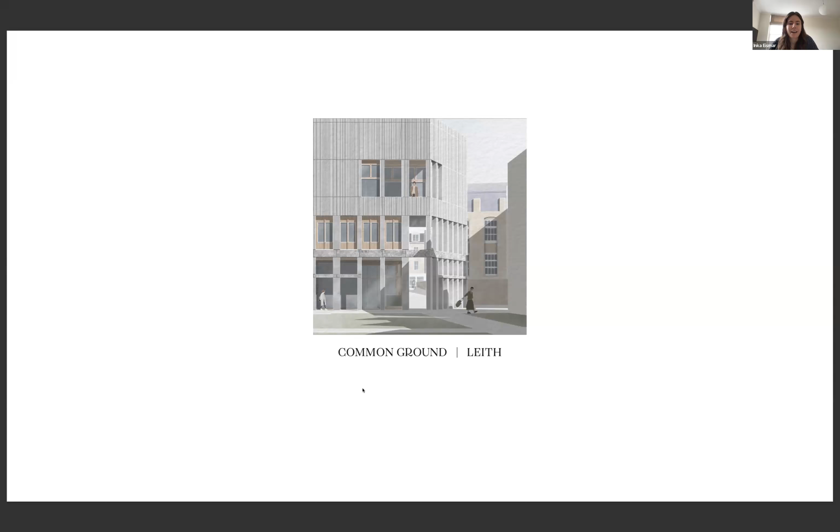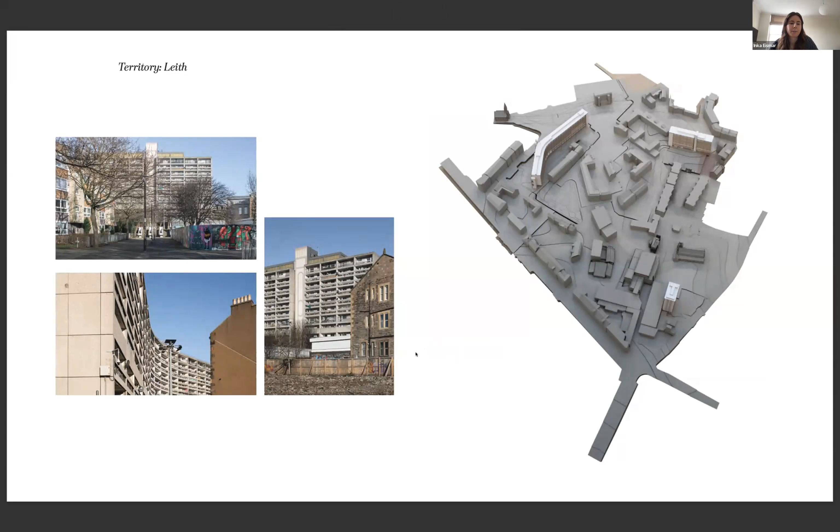The project sits in a particular area of Leith, bound by several tower blocks, part of a modernist redevelopment of the area, which define the character of this part of Leith and this neighborhood. The neighborhood faces challenges common among public housing estates, such as unwelcoming landscaping and a lack of shared amenities, and a general lack of public space that brings people together, with more of an unwelcoming and fenced-off character rather than something that joins a community together.

The proposal addresses the New Kirkgate development in Leith, a site dominated by one of those large tower blocks and a platform sitting in front of it. Historically, Kirkgate used to be a trade route connecting Leith Walk, which connected back to the city of Edinburgh with the harbour. There were multiple public institutions, from when Leith was a city in its own right, sitting along this connection to the harbour and along this trade route with loads of shops and public institutions. The old town hall of Leith also used to sit in this neighbourhood.

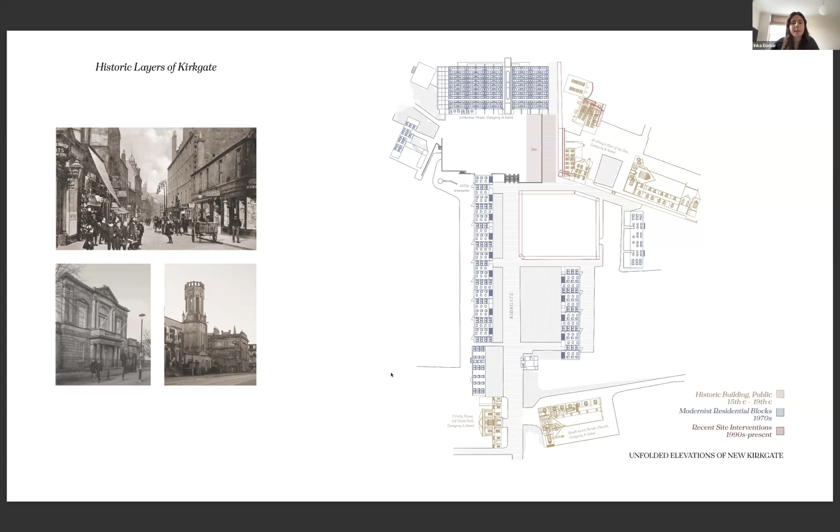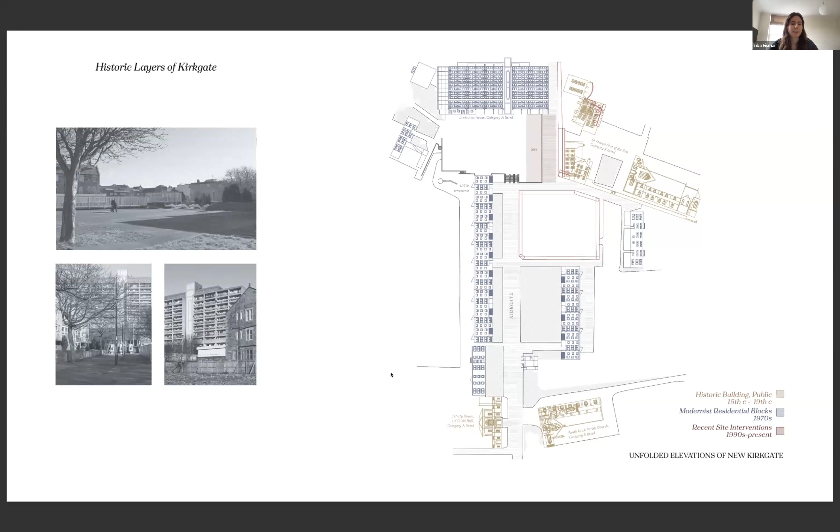Superimposed on this was a modernist master plan, highlighted here in blue, which created a lot of free public space and got rid of much of the historic street pattern. But it then created open space that was more fenced off and inaccessible to the public, resulting in a lot of public space that is currently unused and not really enjoyed by residents.

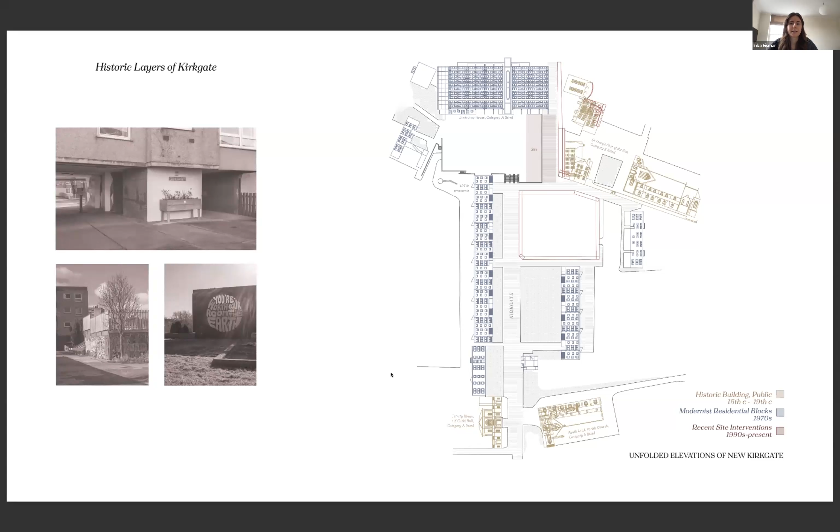At the same time, there have been more recent demolitions and also community additions. Over the last years, there have been more community interventions that have grown organically, with communities meeting in makeshift places in an effort to make the area more livable and bring residents together. This is what the proposal of the town hall builds on.

So with this context in mind, the proposal deals with two main questions: first, civic space as something integral to functioning cities, and second, the current question of what to do with housing developments that have been neglected over the years, and how to transform them so residents can enjoy them again without just demolishing everything and starting over, which I perceived as not very productive.

In the same vein, I dealt with the question of longevity and not starting from a blank slate, designing a structure that is future-proofed and can be reconfigured. So the conceptual approach was to design a building in layers from the outset, as something that will evolve over time rather than presenting one final output.

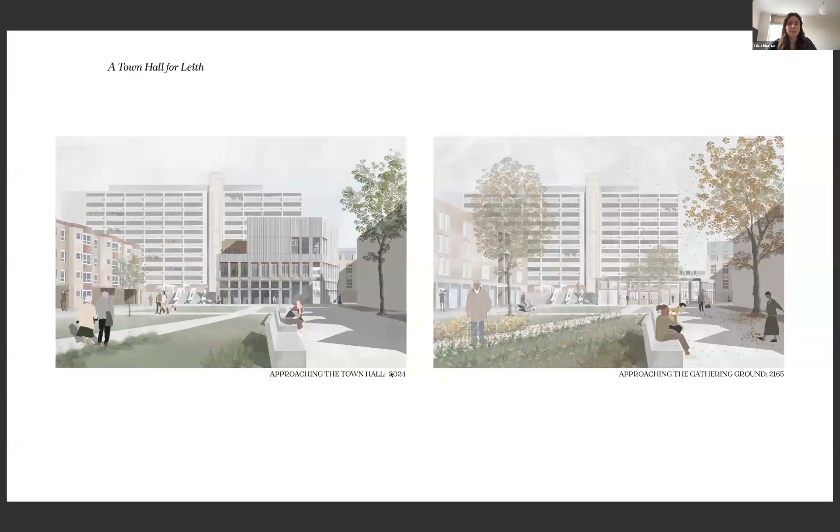As mentioned before, the proposal introduces a town hall to this fragmented site with a program intersecting local government and community groups already present in the area. The proposal suggests both reinstating the physical fabric of Kirkgate as a dense urban fabric, and restoring its social function as a site of civic institutions.

Placing a town hall in this area becomes more of a symbolic move that gives back agency to a territory that has been largely overlooked following the discourse around public housing estates and perceived political failure, and how these estates have been discussed in the media.

So the goal is to transform the territory around Linksview House back into a thriving civic space that actually brings the community together.

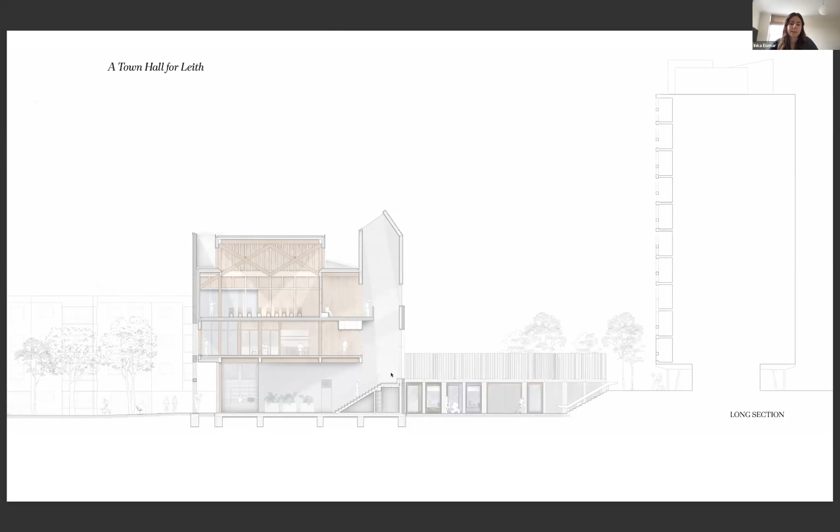From an architectural side, I looked at the open public space and took inspiration from the smaller spaces created within these modernist housing blocks, finding their interesting and quite beautiful nooks and niches, which seemed more appropriate to human scale rather than those large unused platforms and streets.

From a site perspective, the town hall divides this open space into smaller squares more appropriate to community uses, and acts as a hinge point between those squares and the routes, tying the town hall back into the wider city.

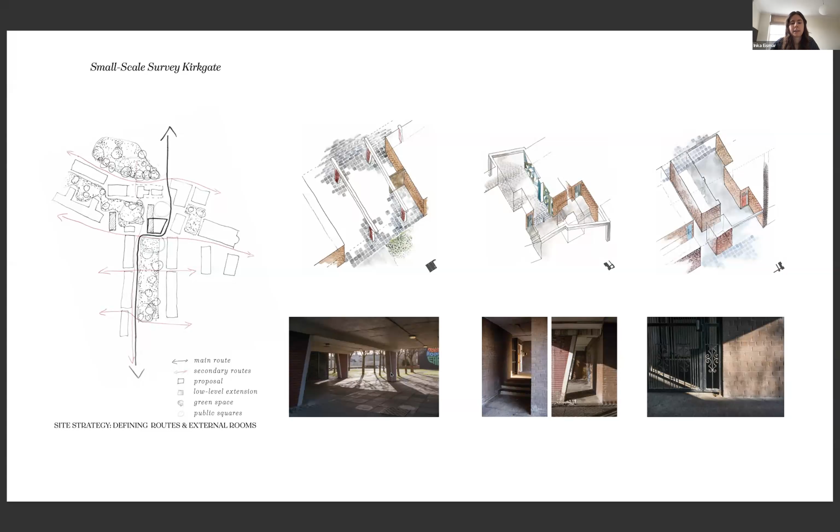The program combines traditional functions of a town hall, like the debating chamber and administrative section, with spaces for community groups, giving those groups that already exist in the area, and potential new ones, a platform of advocacy and interaction with local government to increase the reach of their voices.

The building is structured according to a simple hierarchy, where community groups and commercial and public facilities are placed on the ground floor, with administration on top, and a debating chamber sitting at the very top in a double height space.

There's a possibility that the administrative parts, like offices and meeting rooms, can also be taken over by community groups—so not drawing rigid boundaries, but creating multifunctional spaces for different groups.

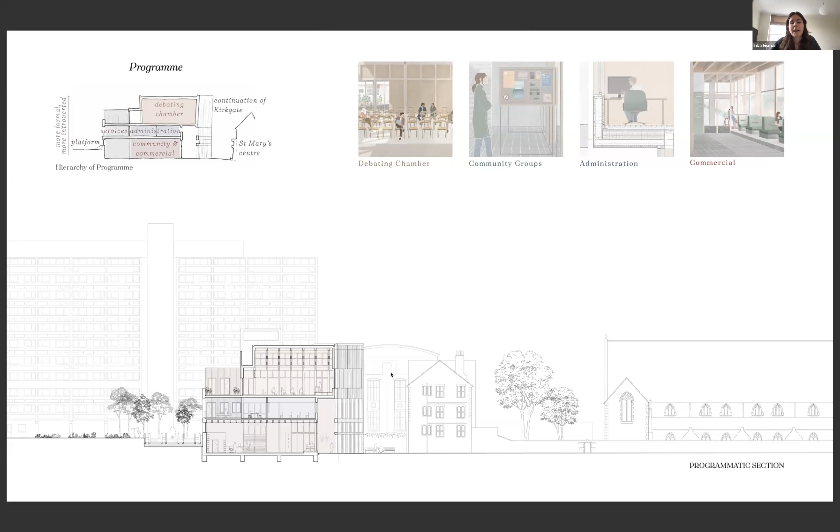As mentioned, the most essential part of this design intervention was the transformation of this little-used public space around Kirkgate into a vibrant public space. The proposal seeks to safeguard the newly created public space beyond the lifespan of the town hall itself, which I envisioned by designing the building as a system of structural layers, each with its own rate of change, allowing consideration of adaptive reuse and embodied carbon of the material layers from the outset.

The main layers of the building are shown in the exploded axonometric on the right, with the most permanent layer being the stone envelope at the bottom, which generates an external presence for the building and forms part of the main external load-bearing structure. This is designed to outlive the building itself, with the possibility that it might frame an external square even after the town hall itself is dismantled.

This was inspired by the ruins of public institutions found all along Kirkgate, which form intriguing open rooms that I aim to emulate with the design itself.

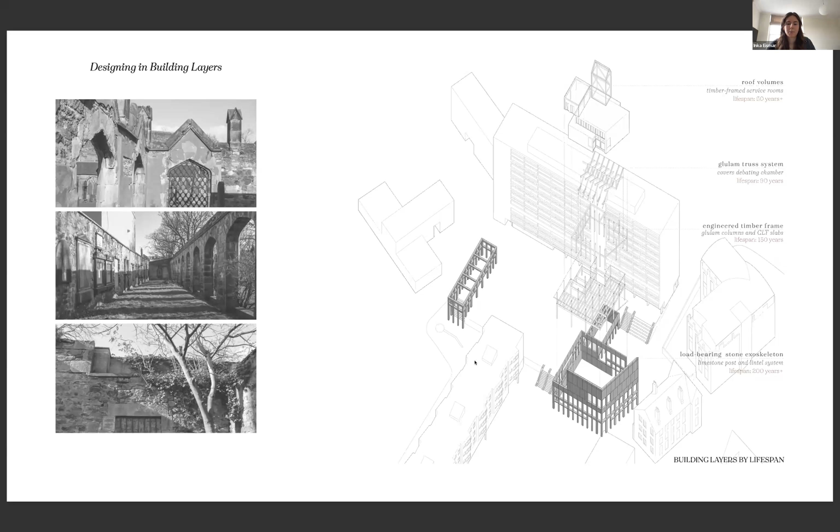Besides stone, the second load-bearing material used in the building is timber. While the stone is used to frame more external permanent spaces and generate a civic presence, the internal timber frame is used to enclose the internal gathering spaces, divide up rooms, and form the internal character of the building.

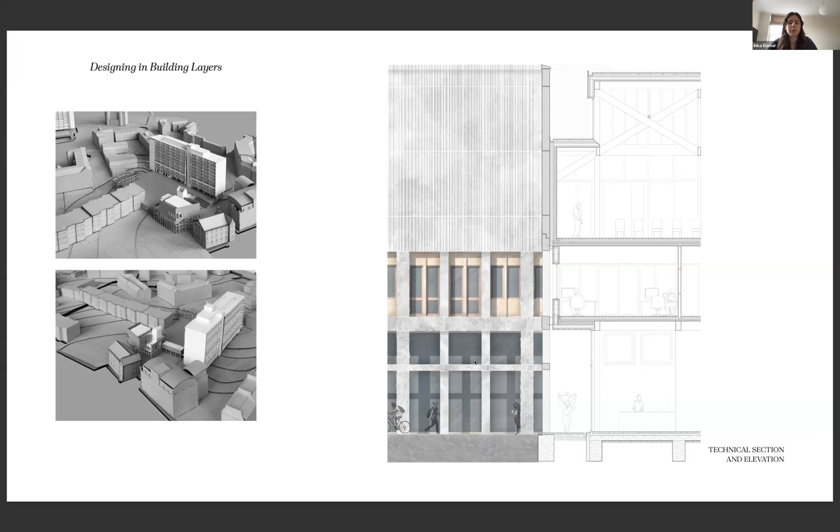I chose a low process approach for the stone, meaning natural extraction marks from the stone are used to express the order of the facade, which reduces the carbon used to finish the stone itself, so it's mostly just the extraction process and transport which result in the carbon footprint. There's potential to offset parts or all of the stone's embodied carbon by the carbon sequestered in the engineered timber frame.

The concept of reconfigurable building layers allows for the consideration of all stages of construction, from construction, use, disassembly, adaptation, to ruin at the end.

By looking at designing for disassembly, I looked at designing mechanical connections so that the building could be taken apart again into its individual components at the end.

It also allowed me to consider options for adaptive reuse, which would, for example, in this timeline be to take apart the debating chamber, which is double height, and transform it into two separate floors, enabling the creation of a mixed-use office or housing block.

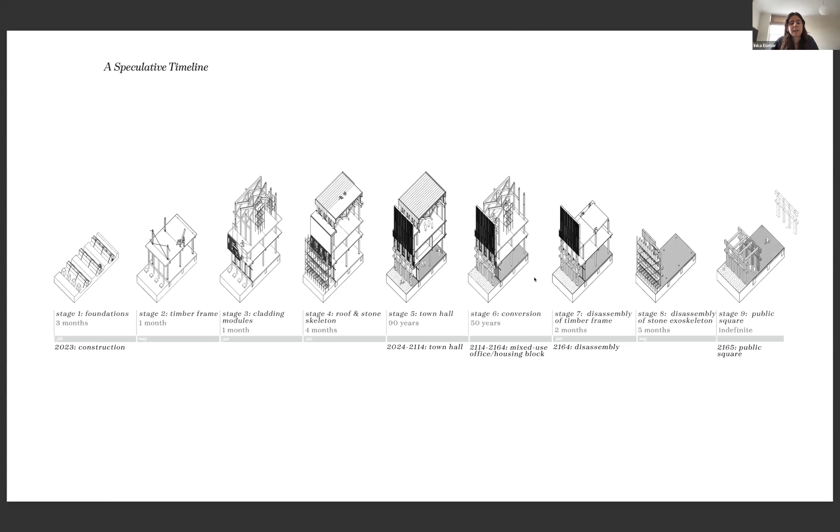In any case, the final stage of the timeline would be the public square, which was central to the design of the building—the idea that even after the town hall itself is gone, there will still be a communal gathering ground, enclosed or semi-enclosed by the stone colonnade, with parts of the facade remaining in place and other parts relocated to form a sort of double colonnade around this little square.

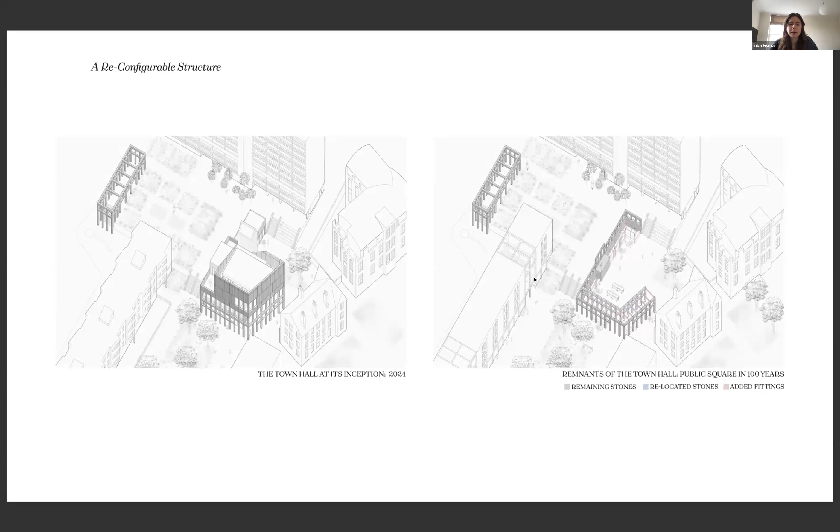Circling back to the town hall itself, the concept of the two material layers—the external stone envelope and the internal timber frame—influenced a lot of how I envisioned the building, with separate layers through which users would move, and the idea of this inhabited facade engaging with ideas of openness and transparency in a public building without being too literal about glass being used and just being a very literal, transparent building.

This tectonic separation of the thermal envelope around the timber structure from the stone structure also created offsets in which external spaces can be accommodated within the buildings, for example colonnades and balconies, which engage with this idea of outside, linking back to the survey I conducted initially of those passageways that run under the modernist housing blocks in the area.

While this site strategy reinstates the historic route through Kirkgate, which was lost in the 1960s master plan, this notion of street is also considered at the building scale, with urban typologies like the street and the square used throughout the building in a route that leads up to the debating chamber at the top.

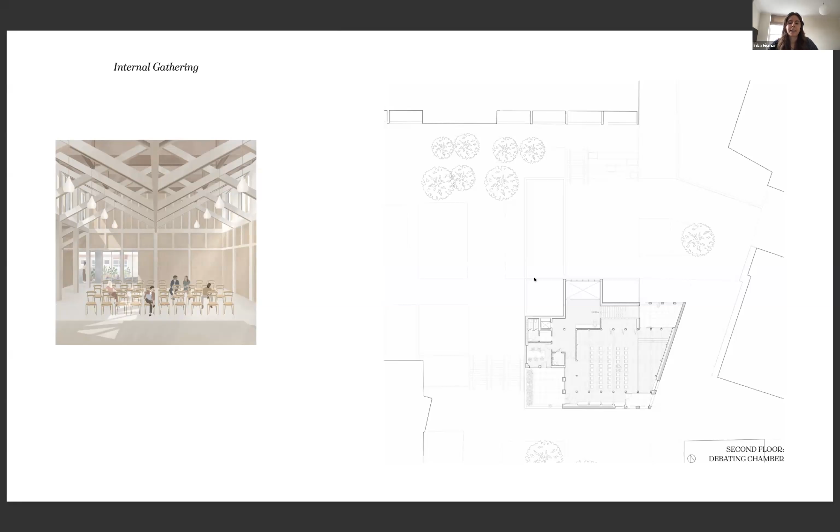This played with the idea of extending the public realm into the building itself through this route, which then ends and culminates in the debating chamber.

Leaving you on this little model image that I spent way too much time on during the semester.

So just to reflect on what I've been up to since last year, because it's been a year since the award ceremony—I was in my undergrad when I did this project, and what I've been doing in the meantime is taking a year out to work.

I've been working at Groves Rains and Leaf, or GRAS as it's now called, which is actually very close to the building site, so I've been driving past it pretty much every morning. I've worked on some conservation projects in the north of Scotland, which was very interesting because I learned a lot about traditional stone structures as opposed to the more modern Amin Taha inspired approach I took in my own project—very insightful, and I learned a lot throughout the year.

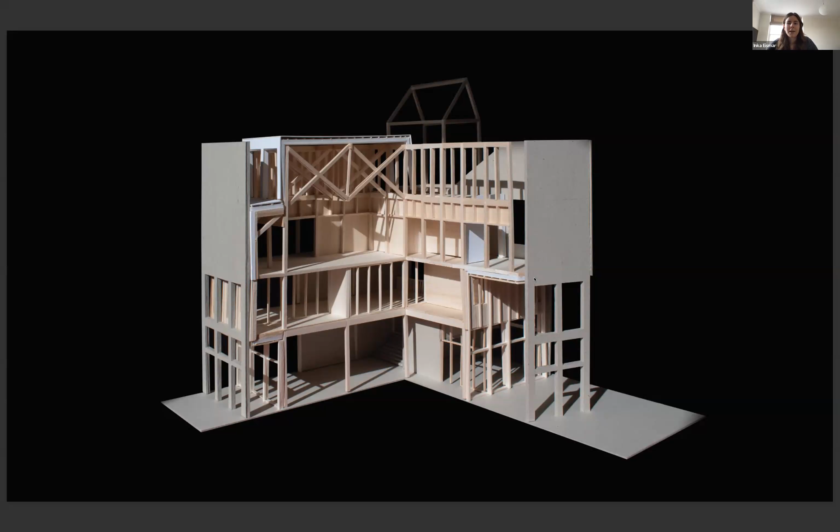The project did pretty well, and this has opened up some opportunities in terms of being invited to talks like this to present the project. I've also been invited back to ESALA, where I initially did this project, to present it and give a lecture on it to fourth-year students who were finishing up their undergrad year.

If anything, this experience has really challenged me to improve my public speaking, which is still a work in progress, but hopefully I'm getting there. Now I am going back to uni to pursue my master's, so hopefully that'll all go well. But that's it for me in terms of my project and my experience since completing it.

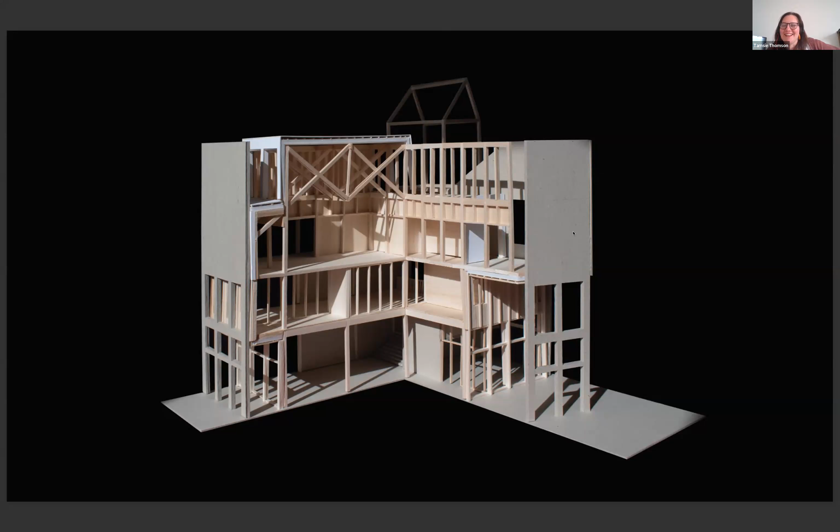Thank you ever so much, Inka. I think we can all agree, I don't know what your public speaking was like before, but it's certainly very good now. So thank you for sharing that with us. A very, very beautiful project.

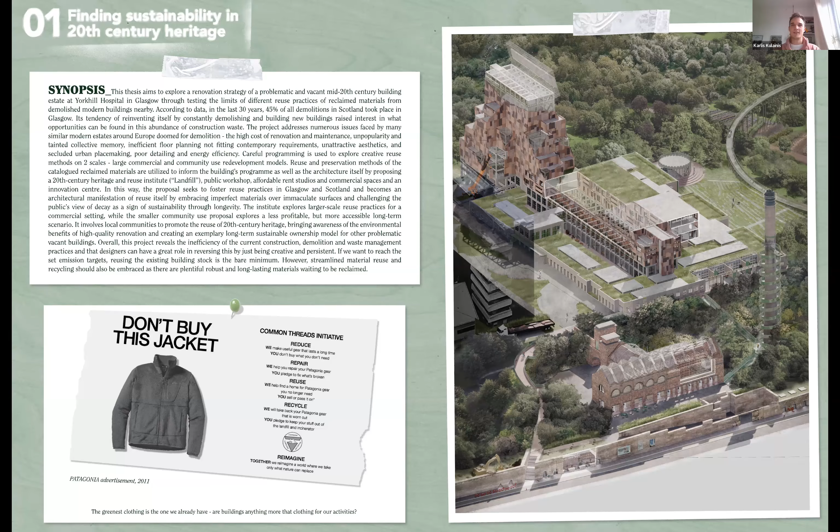And there you can see that's the final proposal already finished. But it was quite a long step, quite a long way to get there. So you can see how that happened.

Our site was in Glasgow. Normally in GSA, where I was studying, you get to do projects in a lot of other cities around Europe, but at the time, due to COVID, we were still based in Glasgow. I'm originally from Latvia, but having lived here for 5 years, I got to know the city quite well.

I was always interested in this context where there's a lot of demolition happening in Glasgow. Statistically, in the last pretty much 30 years, half of the official demolitions in Scotland happen in Glasgow - that doesn't count unofficial demolitions. That showed me there's a lot of materials being moved around, maybe wasted a bit more, and I wondered if I could look into that.

There's also this interesting historic narrative where you can see from medieval Glasgow, there's not really that much left. I'm from Riga, Latvia, where we have our medieval old town center, with lots to see and protect, but there's not that much in Glasgow, because already back in the Victorian age, buildings were demolished due to the filth of the city at the height of the empire - they didn't want that, so they demolished it and kept moving west.

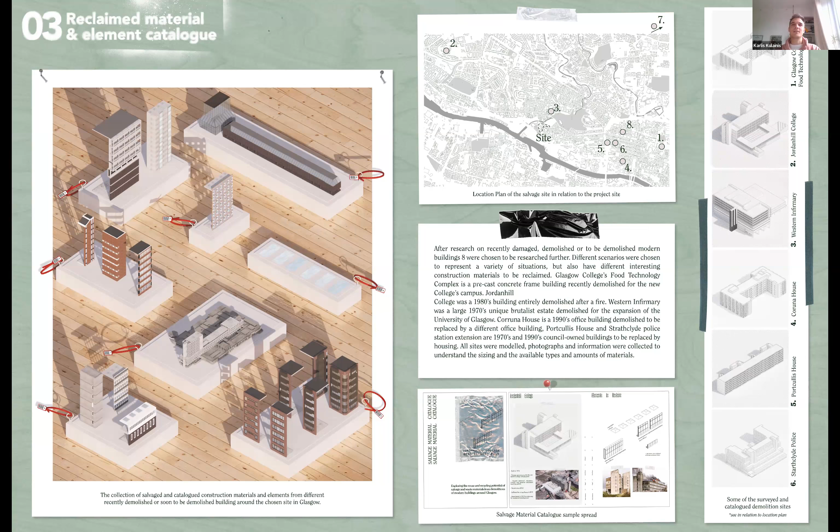But obviously I would need a site as well to test this. So I set out these criteria, wanting a quite problematic site. I set out 6 criteria.

It has to have poor detailing and poor efficiency, quite specific floor planning, so the building is built for just one use, and it's generally quite unpopular. Maybe even has tainted collective memories when the function of the building was something else that has a memory to it.

So if the aesthetics are not that attractive, it's quite costly to renovate, and often with these modern buildings that tend to have very secluded urban placemaking, or they're plonked on a big field.

So I looked at all kinds of sites from Glasgow, and I landed on the Queen Mother's Hospital building in Yorkhill, this ginormous building that used to be, in the 60s, Europe's most modern maternity hospital. Probably at its height it was a very regarded building, but by now it's completely vacant, has been for many years.

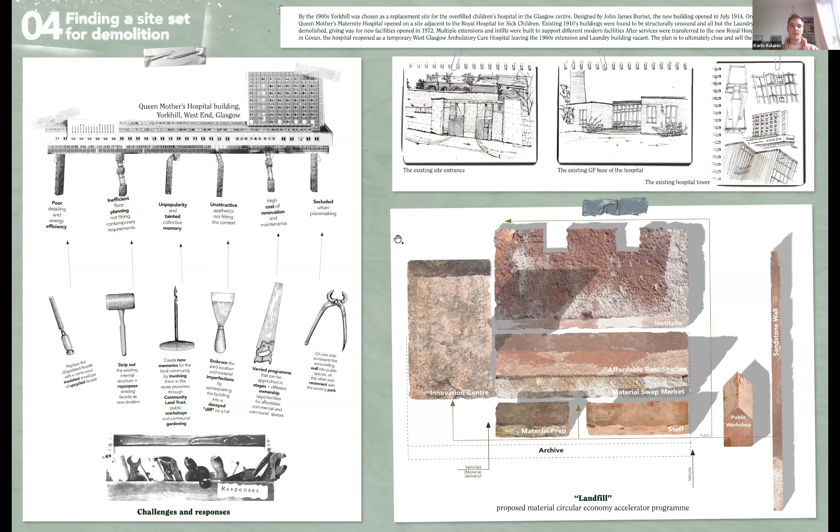But the main architectural moves - I mentioned the secluded placemaking. The site is located on a very tall hill with a big sandstone wall around it.

So what I thought is, as a response to it, embrace the site, embrace the context of being on a hill, using different architectural elements I'll talk about later, turning this building into a big piece of stone, like a big cliff on a hill with a glazed top, like a castle on a hill, really openly embracing it being there instead of shying away from it.

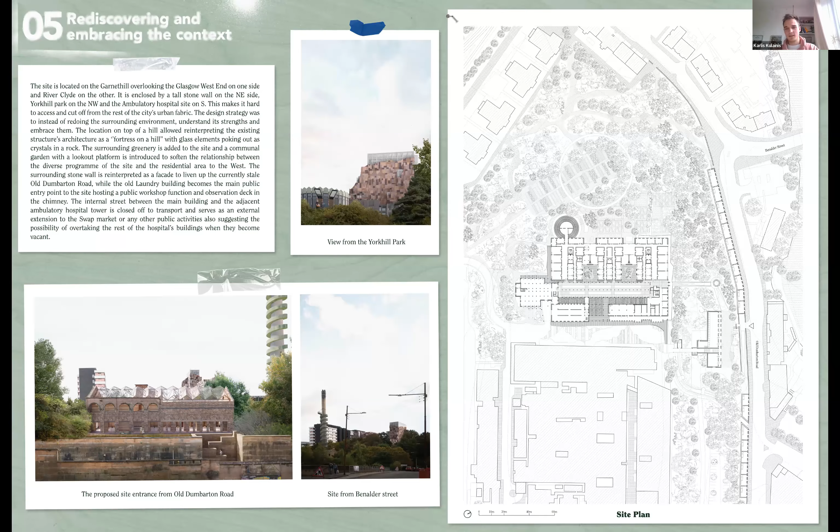Talking about the materials, you can see I supplemented them, but while doing this sort of cataloging of materials, I was also trying to think about what I could actually do with them. Obviously you can't take old materials from somewhere else and just straight up use them on another site.

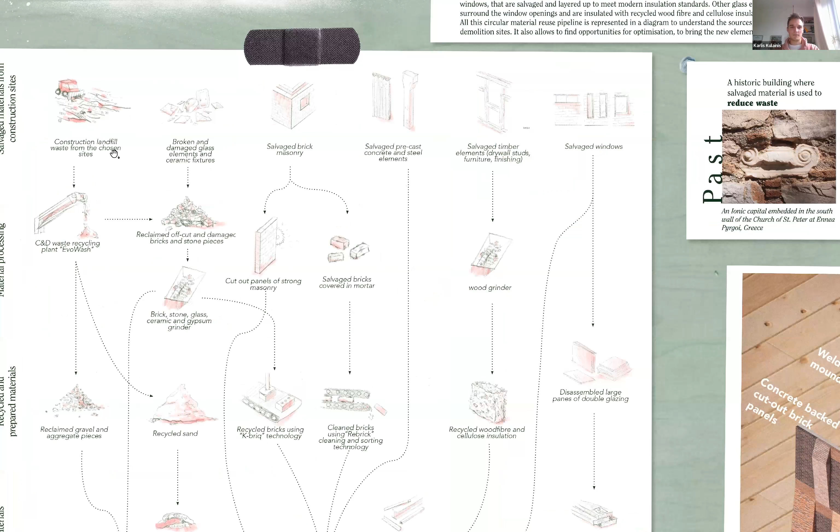So I ended up developing this pipeline: construction materials collected on these sites, the waste, the broken ceramics and glass that can still be reused in some ways, the salvaged brick or brick panels. That was a technology used a lot in, I think, Denmark, where they cut massive panels of brick. That was one of the strategies, or just precast concrete elements themselves, or timber elements, or windows.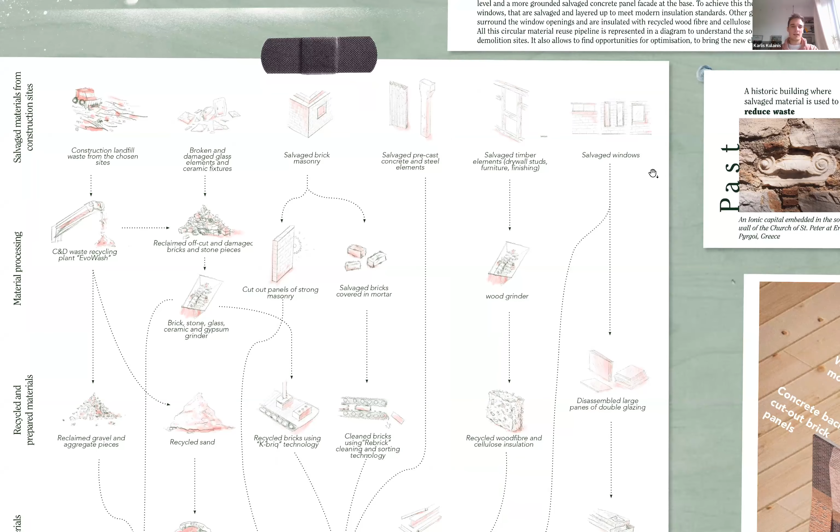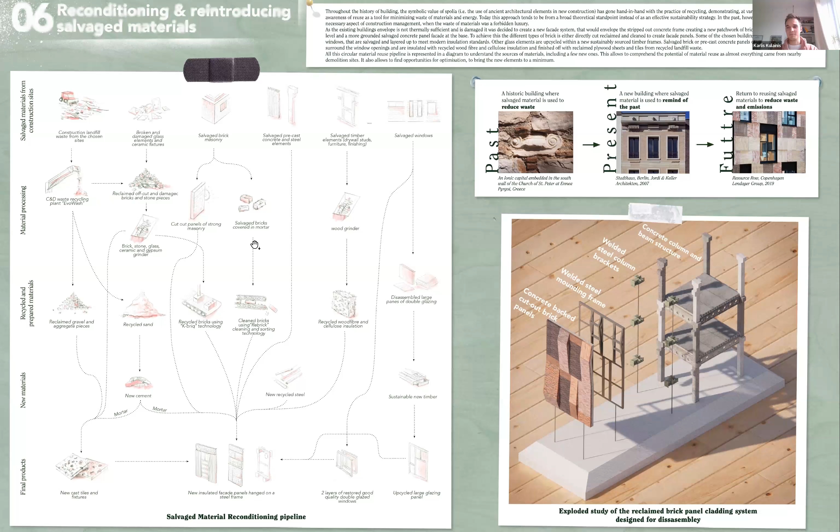I looked at different precedents of how they're processed, either grinded, cut, or there's some fascinating brick salvaging equipment out there, or just grinded up to end up with already recycled, prepared materials. Then obviously I would need to add a few new materials and some new cement, new mortar, just to join a few things together.

So that was the only place where I would add new materials, and I ended up with new products like new cast tiles and all these insulated facade elements, and then windows.

You could see how this would go together conceptually. All the precast concrete frame elements are reused, with the steel being turned into these disassemblable brackets, the new steel frame, and the cut panels hang on to it.

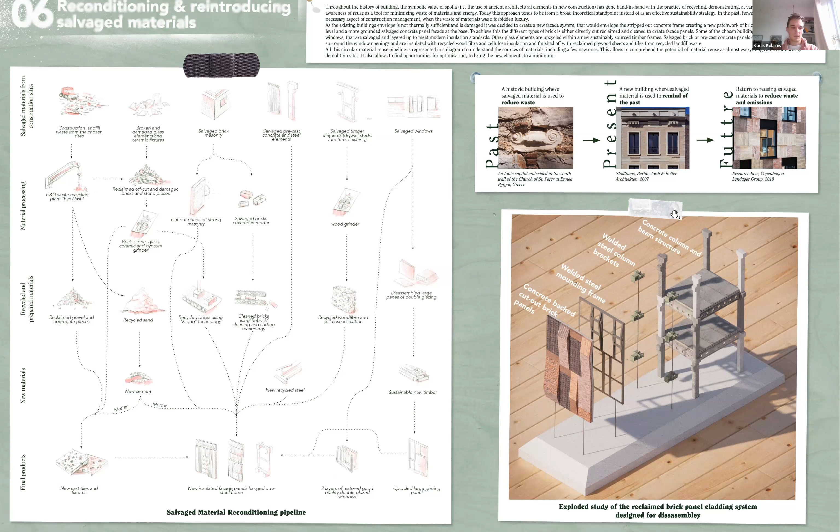All this was inspired by the concept of spolia, if you've ever heard of that. I found it fascinating that in the past the concept of spolia, meaning reusing salvaged waste basically, has been around for centuries and centuries.

Archaeologists have found pieces where you can see, for example, the Ionic capital being reused in the church of St. Peter's Church in Greece, just as a building material between bricks. Back in the day, producing materials was very hard—making bricks, making all these stone carvings—so people really couldn't waste material. It's not really that they cared about the environment that much back then; it was just a very practical thing to do.

These days, the concept of spolia is used more just decoratively. You can see this a lot, often in places where a found object during construction is displayed on the facade, just as an architectural feature.

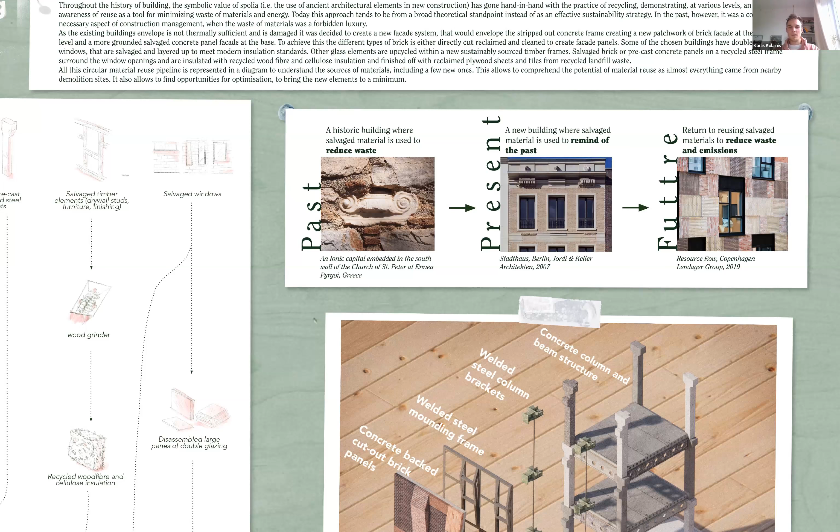So I was thinking, could the spolia concept be brought back to where it originally was, when these found materials are actually used as a practical means of reducing waste and emissions, in this case?

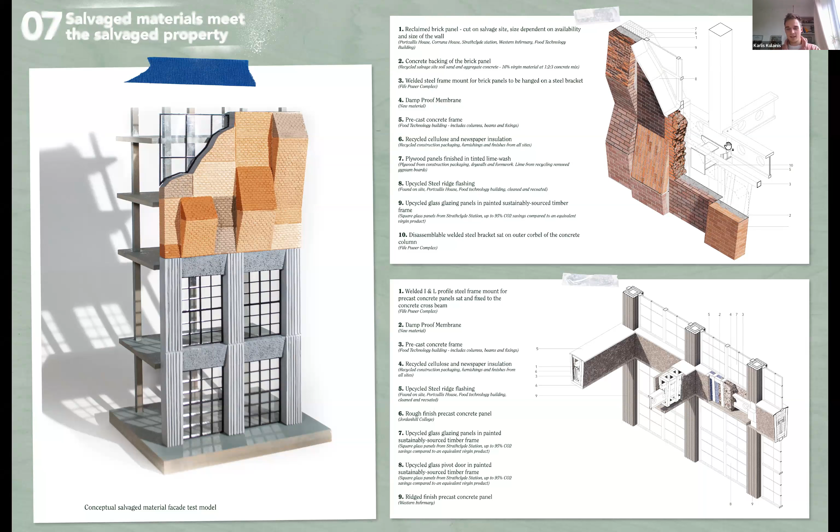Here you can see more of the detail, the construction detail, as it was developed further. I built a model, and you can see the brick panels being hung on the precast elements, and in the details of every element designed, it shows the sources where they were coming from.

So all the steel was coming from the Fife Power Complex—it was this big power station being brought down that had loads of steel in it—and I could either reuse some of it, or like the concrete frame, the precast concrete frame was coming from, I think, the cooking school for Clyde College.

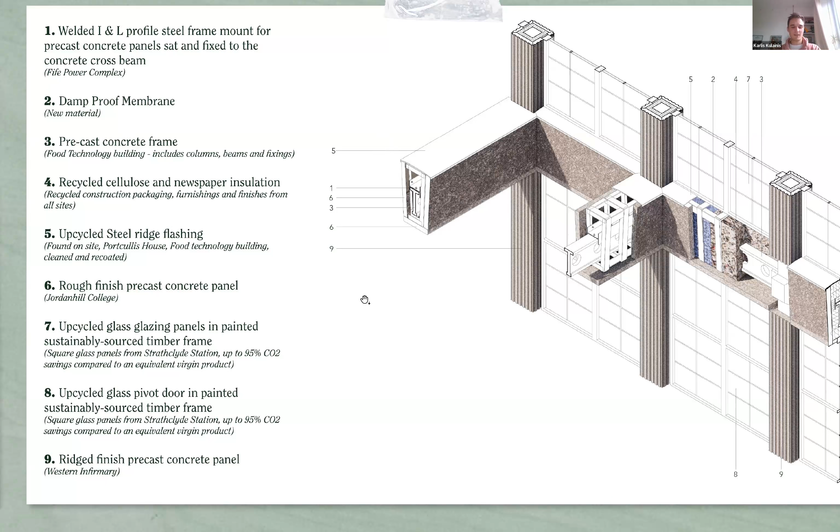So all the details were not only thought about in terms of how they come together, but where they come from. Some of the embodied carbon was calculated as well, especially for the glass. Reusing glass can be very sustainably impactful, saving up to 95% of CO2.

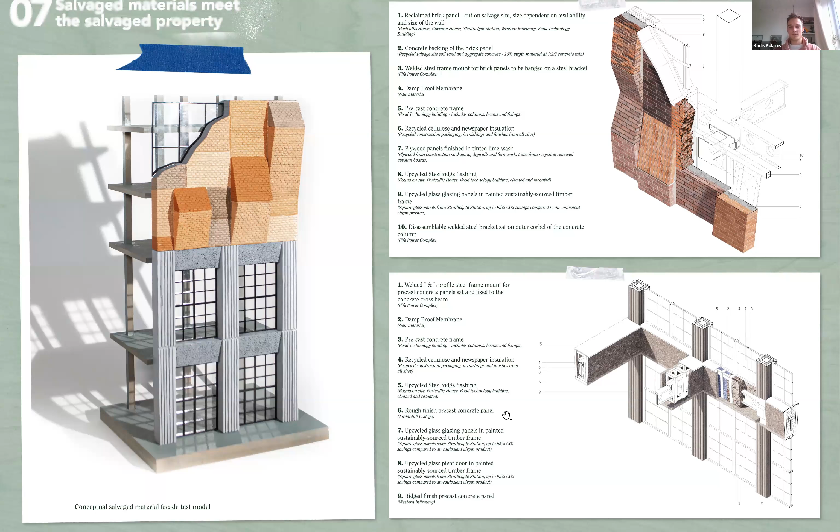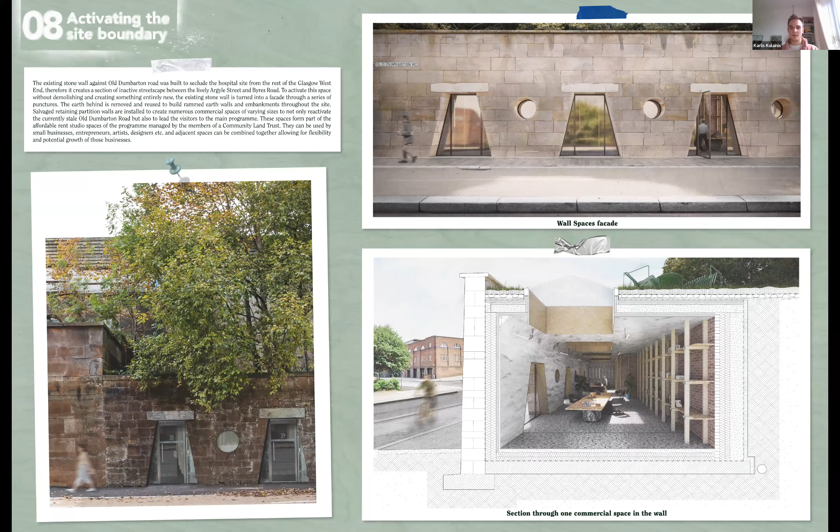And then I mentioned the big sandstone wall - that was a sort of master planning wise quite a big issue. The site is quite secluded, with a big sandstone wall around it. I thought, could I open up this wall by puncturing it along the whole estate, turning it into a facade with different commercial spaces on the old Dumbarton Road. This road is located between the very active Byres and Argyle streets, and is currently a dead space in between them. Doing this could be an effective move to liven up this place and connect these two already lively streets in Western Glasgow.

As I mentioned before, one of the ideas was that as the program is about reuse, it's really to educate the public on the benefits of quality reuse. There's an existing 19th century laundry building, the only leftover building from the original children's hospital. It's in a sort of derelict state, but I thought it was very beautiful, and that could become the main attraction to people when they come into the site, becoming the public workshop where the institute's findings could be taught to the public.

One interesting architectural move was proposing to insert a big dividing rammed earth wall, having a building within a building. All the earth excavated from behind the sandstone wall wouldn't be removed from the site - removing earth is quite a big cost in construction. It could be retained on site and reused as an insulated rammed earth insert into the existing laundry building with a glass roof.

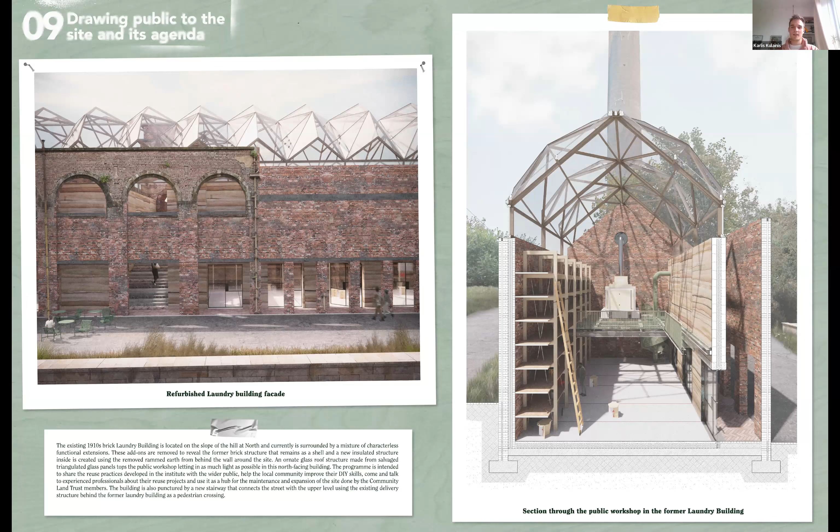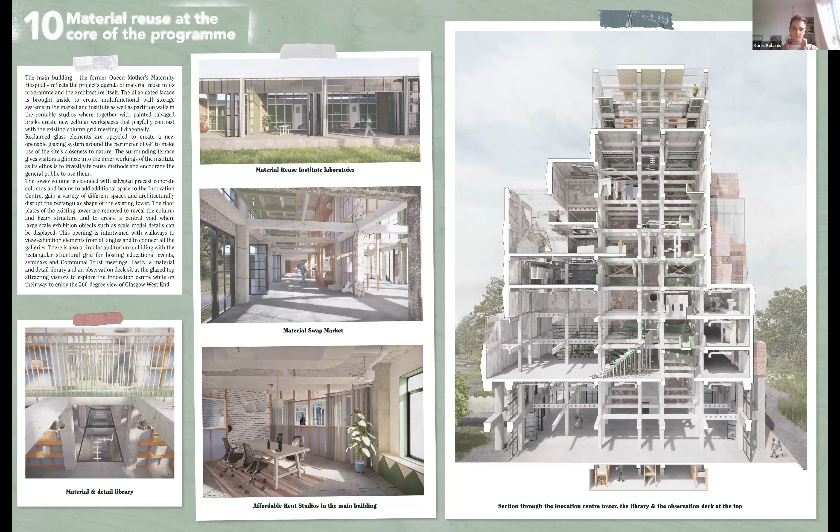Overall, this whole project became about embracing imperfect materials over immaculate surfaces, and in general challenging the public's view of decay - seeing decay more as a sign of sustainability through longevity instead of something that needs to be torn down. That's me, thank you.

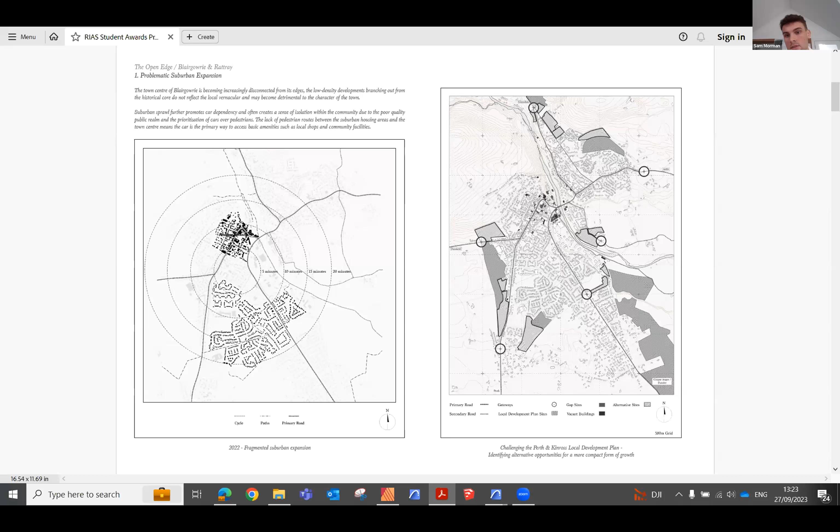I also identified gap sites within the town centre, much smaller for smaller interventions—both brownfield sites and vacant existing buildings that could potentially be reused to rejuvenate this town centre, which is dying as the death of the high street has happened to towns and cities across Scotland.

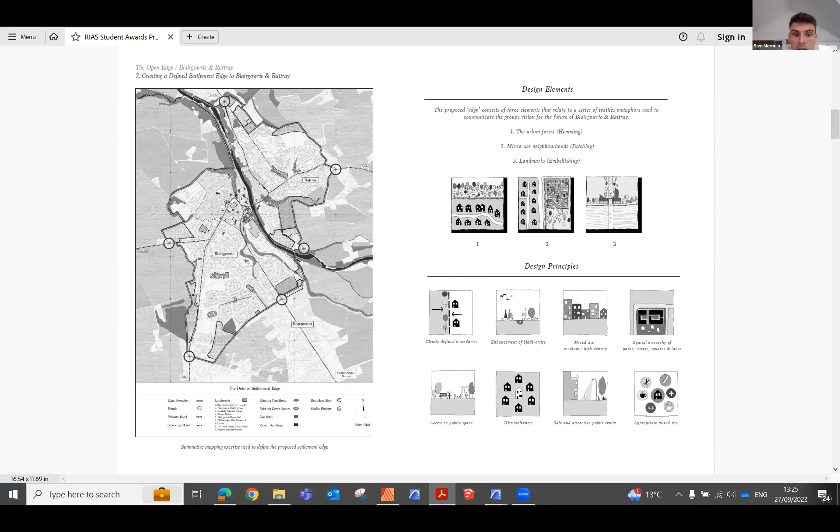So then I came up with a series of design principles for the developments on the edge to consider, such as enhancement of biodiversity, appropriate mix of amenities, and clearly defined boundaries and access to public space.

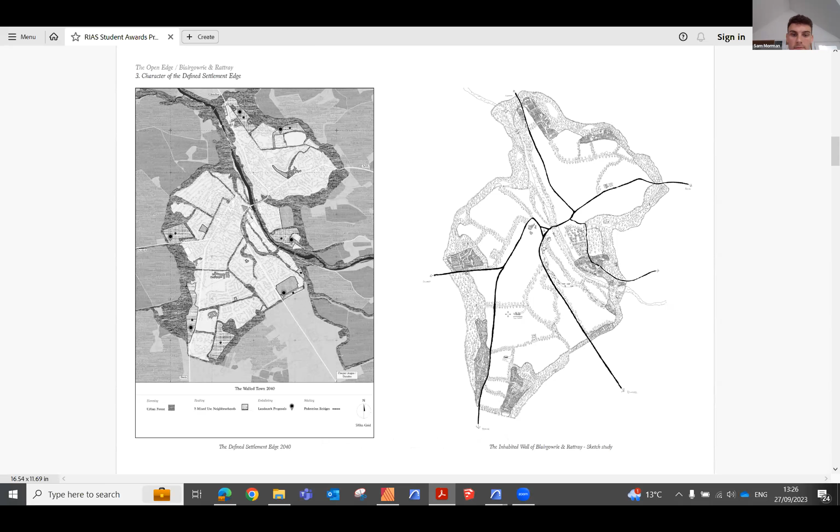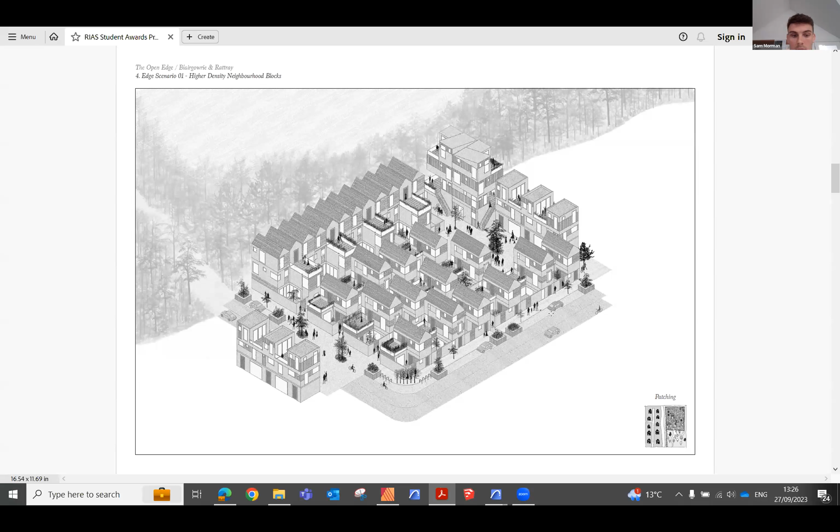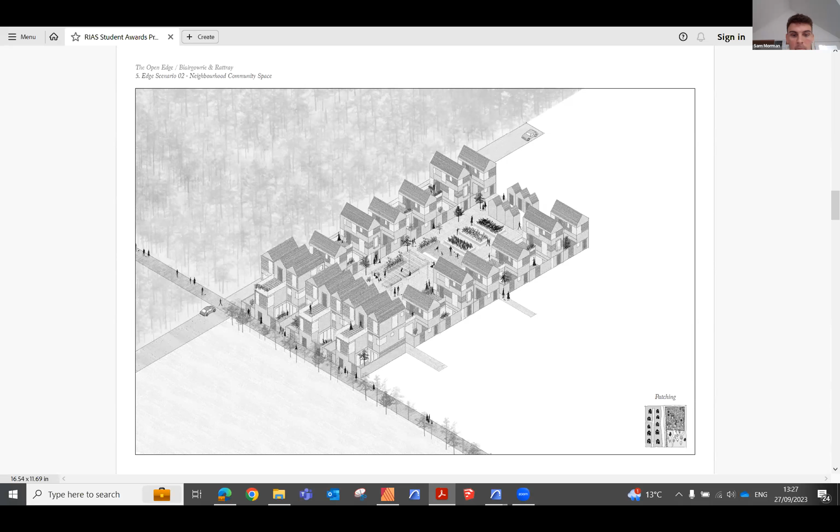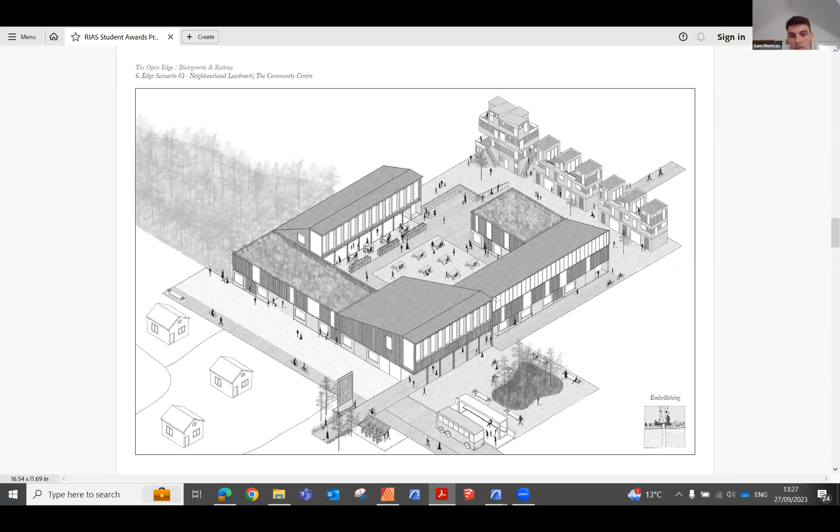And then we've got the urban forest - as I said, that acts as a kind of boundary to restrict the suburban sprawl. And then the new public realm that runs through the urban forest promotes active travel methods and connects each of the neighbourhoods, with parks and smaller breakout spaces.

There's electric bikes that allow you to just jump on, and like many major cities, you can jump on a bike or a scooter and get your way through the forest, getting from one side of the town to the other while going through a nice natural landscape, as opposed to just jumping in your car.

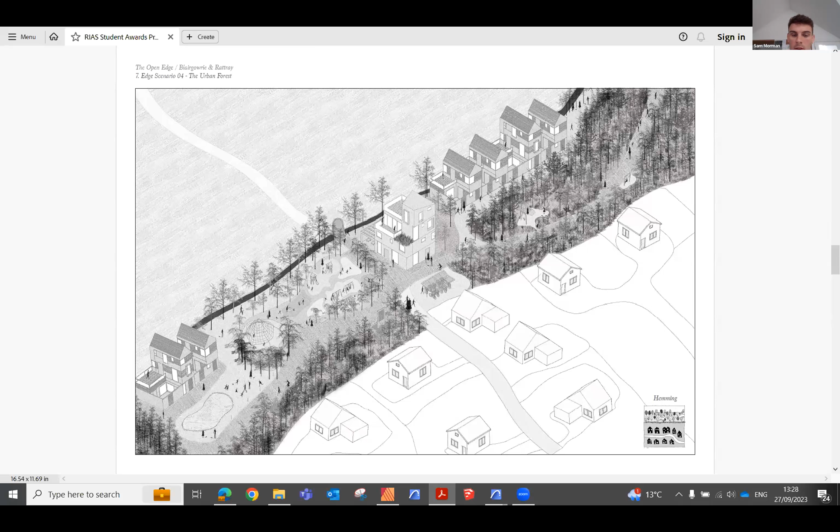So then I took a fragment of this edge - this is kind of your entrance point from Dundee, and this is that landmark I spoke about on the corner.

I studied that in further detail and tried to compare what the densities might look like. So you've got the typical suburban streets with big driveways and winding roads, and then these higher density blocks that start to try and phase out the need for the car.

If you're in these neighbourhoods, if you could get to the point where you're sharing and there's only a few electric cars on the outer edges, predominantly bikes, and you've actually got access to community facilities, it reduces the need for people to jump in their car and drive away from the town and spend their money elsewhere.

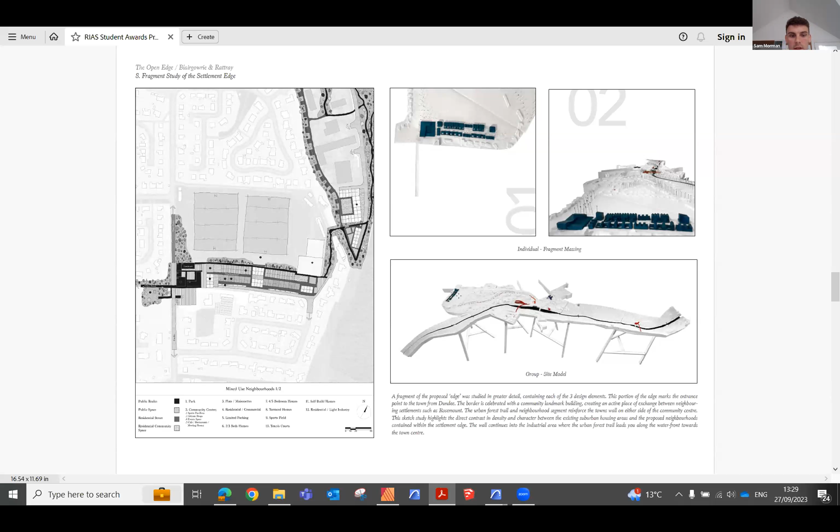So this is kind of our group model. It just shows a little portion of the edge that I modelled, and it was part of a wider group strategy in Blairgowrie, where there's a series of different proposals mainly focused on individual architectural interventions as opposed to larger projects. There was some self-built homes that all tied in together as part of a unified group proposal.

This little sign indicates where you can follow along the urban forest to reach different destinations and community landmarks and other neighbourhoods.

And this is the idea of the neighbourhood street. It's overlooked - kids can come out to play, walk your dog, meet your neighbours. It reminds me of many European cities as opposed to what we're seeing constructed in Scotland today. No sign of the car, trying to reduce the dependency on that.

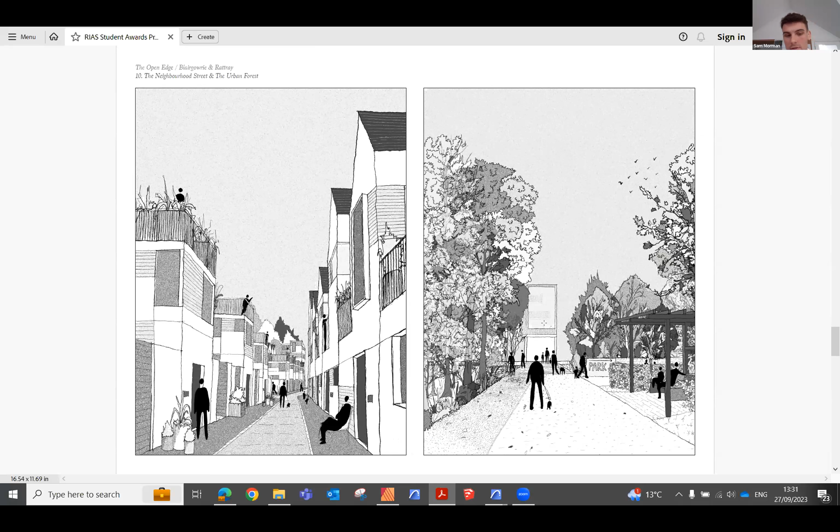And this is the idea of the urban forest. As you're coming through, you've got landmarks, you've got these breakout spaces, and it really gives Blairgowrie a unique identity as a biodiverse town. It actually goes back to medieval towns - you've got these walled towns and everything's happening within a confined area. That was a big inspiration in this project.

We do a range of projects from residential work, but we're moving on to a lot of bigger commercial stuff. The small scale residential stuff is what I've been working on predominantly, as a way to prepare for my Part 3 and start getting valuable experience taking projects through various work stages.

And the practice's most predominant project at the moment is St Andrews West - about 90 units altogether over 2 phases, a housing development currently on site. It's been really good getting some site experience. So that's me - any questions, or if you want to take down my email, feel free.